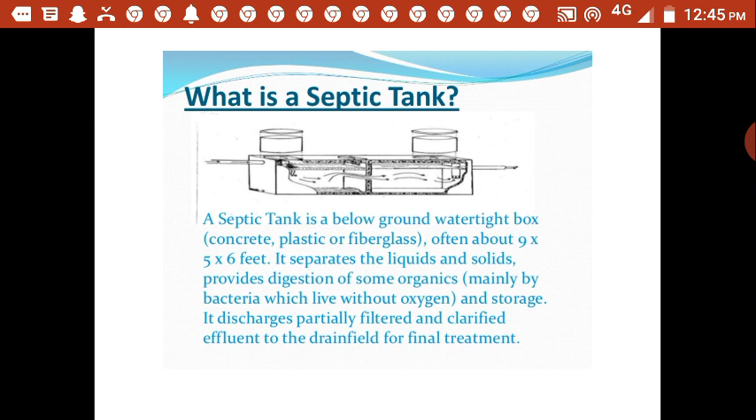Once the anaerobic bacteria digest the human feces, it is divided into small pieces, thereby generating some gases. Those gases consist of carbon dioxide, hydrogen sulfide, and so on, which we'll discuss in detail in the next part. Once it is digested, the pollution related to the septic tank is reduced, and finally it will be disposed to the land. Even after that, some treatment is required.

Then who has a septic tank system? If a building with plumbing facilities is not on a city sewerage system, then in most of the cases it has a septic tank system, also known as on-site wastewater disposal system or subsurface wastewater disposal system, to dispose of the wastewater. Normally in cities also they will implement it.

If you take the example of apartments, if the apartment is not connected to any central sewerage system, then they have to build the septic tank in the apartment itself, and it has to be treated in the in-house treatment system only. Normally we can call it on-site wastewater disposal systems. Means the wastewater is treated in their apartment only.

If it is connected to a central sewerage system, then the whole sewage is taken into one central wastewater treatment plant. Normally we can call it the municipal sewage treatment plant or municipal wastewater treatment plant. There we treat it with many treatment units like screens, grit chambers, sedimentation process, then filtration process and all those things, followed by some biological treatment units. Of course, we will not go in detail about that. But if it is central systems, that will be treated separately.

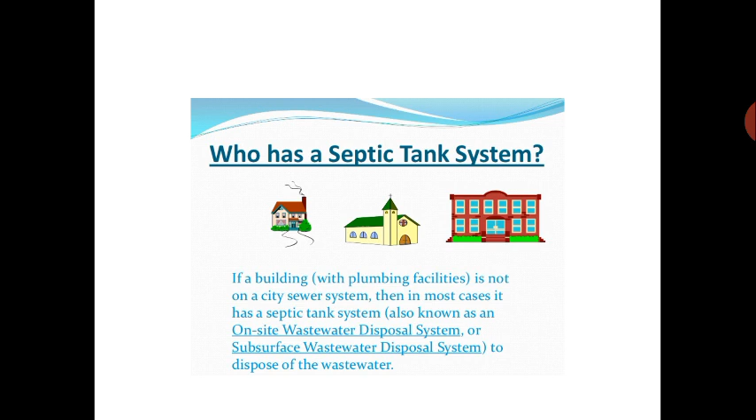So then what is an on-site wastewater treatment system? An on-site wastewater system collects, treats and disposes all the wastewater produced in the building, just like a septic tank. This septic tank is built in the apartment itself, maybe about 20 by 10 by 10. If it is a bigger apartment, normally they will increase the size of the septic tank.

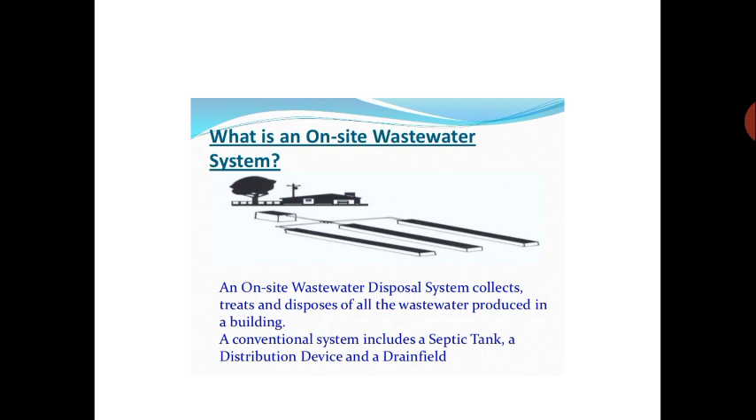Conventional on-site wastewater disposal systems normally include a septic tank, a distribution device and the drain field. The septic tank we already discussed. Distribution devices means whatever pipelines are associated with the septic tank. Then the drain field. What is this drain field? The drain field is also known as the nitrification field.

If you see the composition of the sewage, it consists of nitrates, phosphates, and a very small proportion of potash, that is K. So N, P, K are the major compositions of the sewage. These N, P, K we can call nutrients. So I already said that these are rich in nutrients.

Once these are rich in nutrients, to eat those nutrients there will be a generation of nitrification bacteria. This nitrification bacteria is going to eat that nitrogen-containing food, and it will grow inside the system. So in this drain field, normally the nitrification process is going to happen.

It contains a pipe and other approved materials. It receives the effluent, a partially treated cloudy liquid from the septic tank, for distribution and treatment, and whatever partially treated effluent is there from the septic tank will go to this drain field. There it is going to absorb. Approved drain fields are made from many materials including pipe, gravel, plastic chambers, concrete blocks, polystyrene aggregates, and other piping materials.

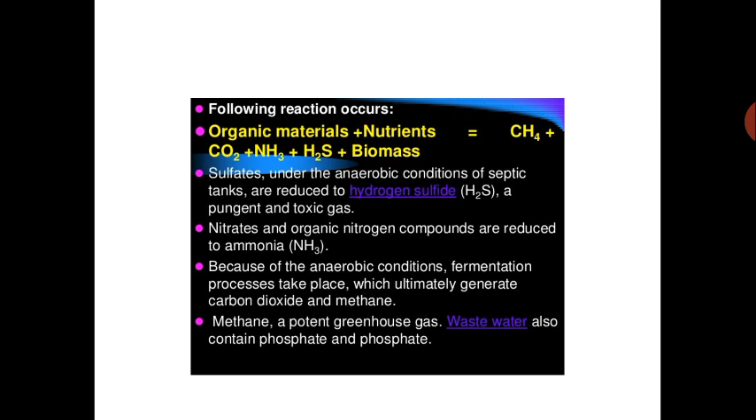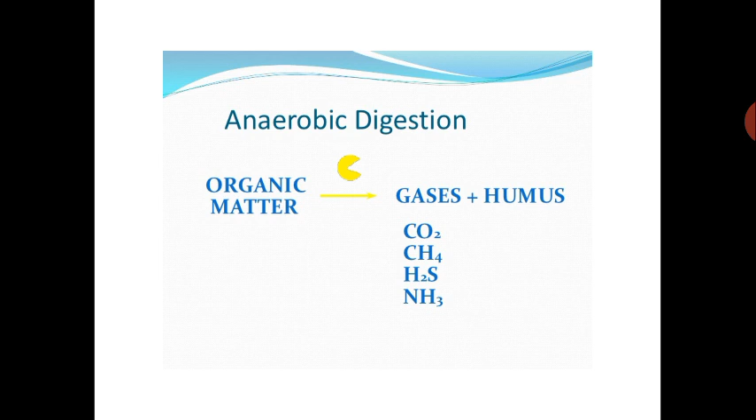Some of the wastewater also consists of phosphates. So this is normally the abstract of the anaerobic digestion process. See how the organic matter is going to divide into multiple gases and other things. The gases which I have listed, that is carbon dioxide, methane, H2S and ammonia, it is going to generate, followed by the biomass. Biomass is nothing but humus. Then what do these on-site disposal systems do? On-site disposal avoids the spread of disease by preventing human sewage from contaminating the ground surface, well water supplies and the streams.

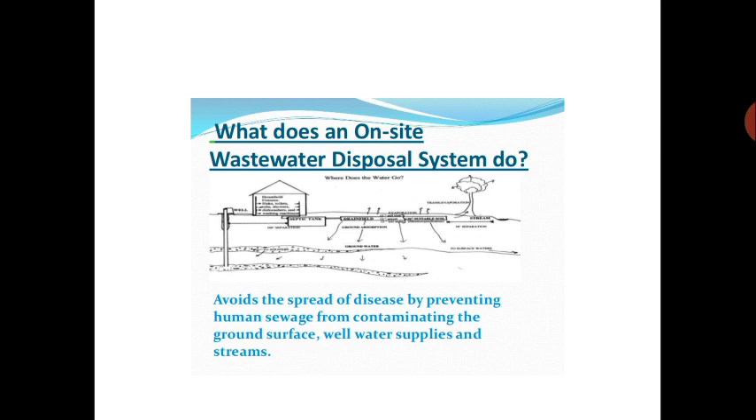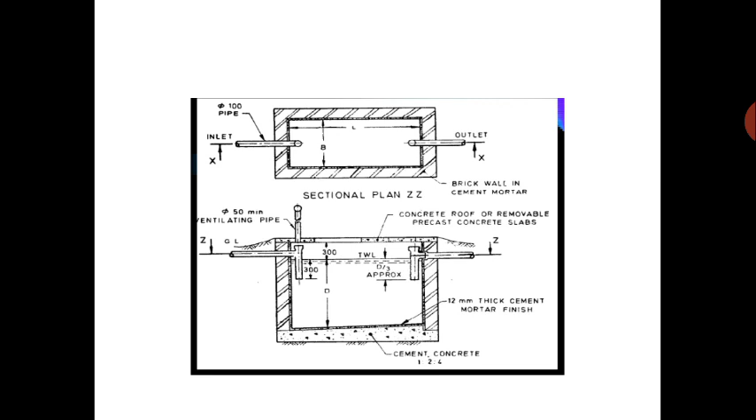This is a typical section as well as the plan of the septic tank. You can see that it is made up of cement concrete of 1:2:4 normally. Then they will use 12 mm thick cement mortar below the bottom of the tank, so that there will not be any leakage from the tank. Once leakage happens from the septic tank, it is very dangerous to the groundwater as well as the surface water. If the groundwater table is high, then whatever leaked sewage is there is directly going to penetrate into the groundwater systems.

And the main problem is that during the rainy season, if this happens, it is 100% going to reach the surface water. Once all the nitrates, phosphates and other things are generated, they join the surface water. Then normally the eutrophication process is going to happen. Eutrophication is increasing the content of nitrates and phosphates in the surface water body, especially if it is stagnant water like lakes. If it is a river type of system, it may not be a problem, because it will flow, and once it flows the water is automatically treated. But if lakes or any stagnant water is there, with no water coming in and going out, in those cases this eutrophication process is going to happen.

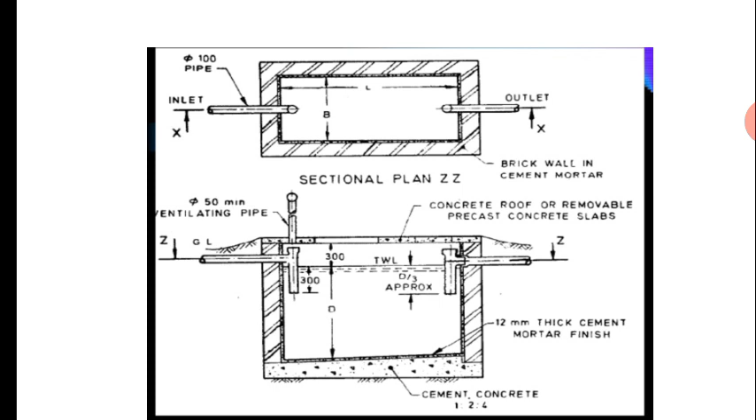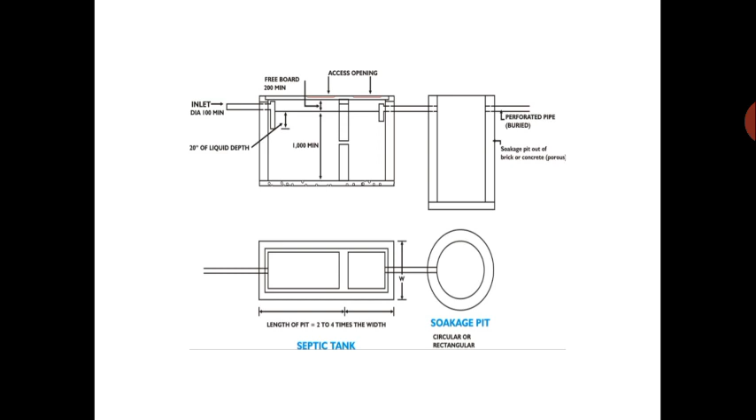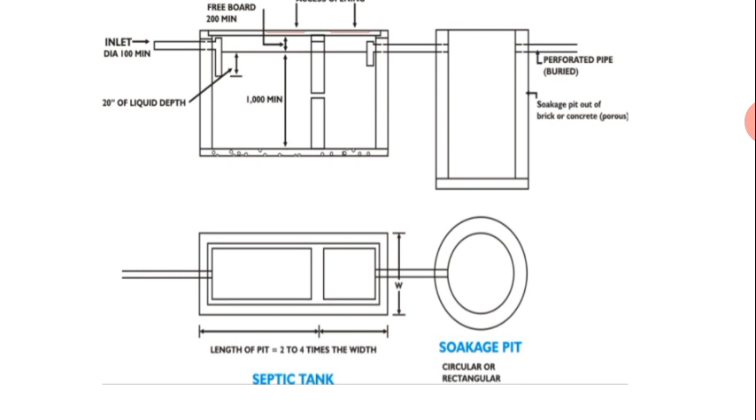And they will construct the wall using brick walls with cement mortar, then the inlet will be there, then the exit will be there. Of course different regions are there in the system that we will discuss in detail. This is how normally it will be: the septic tank, followed by the soak pit. Once the sewage is treated, it will be disposed into the soak pit, where it acts like a filtration process, then finally it is drained off. That we'll see in detail in the next slides.

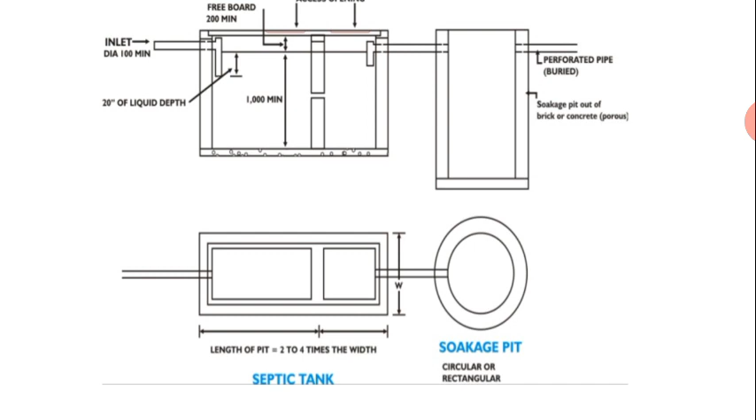So they have given different dimensions; this is a plan and this is a section. Normally two compartments will be there in each septic tank. Of course it depends; if more people are there, then normally we will provide 3 to 4 compartments in a septic tank.

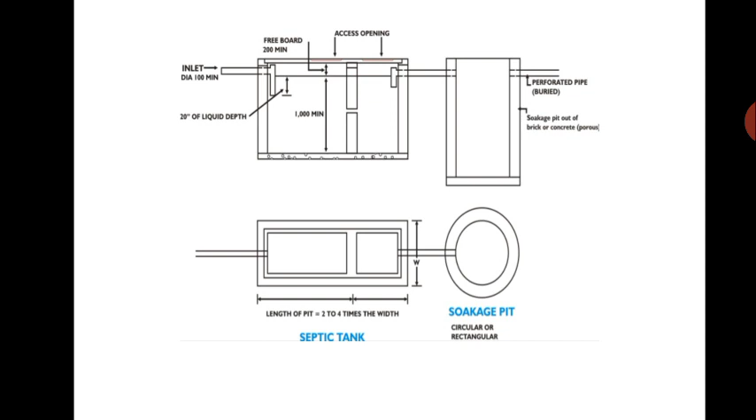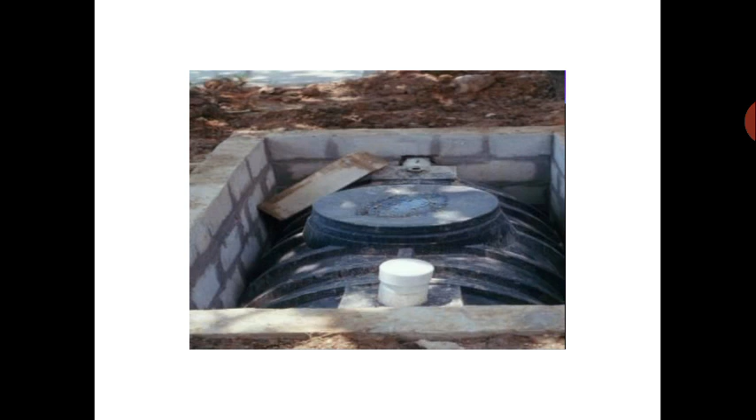This is how you can see the septic tank. Of course this septic tank is made up of polyethylene, where it is completely closed. But this kind of system you can keep anywhere. You can lift those tanks and keep them anywhere, so that nothing is going to happen. It is just like wherever you require, you place it.

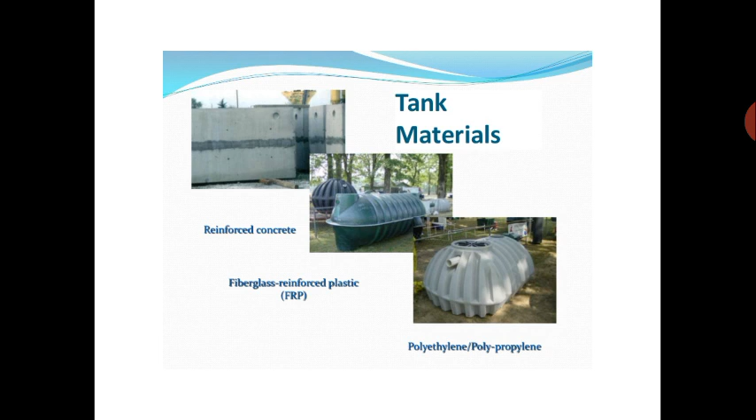The first one is reinforced concrete. The second one is fiberglass reinforced plastic, that is FRP. The third one is the polyethylene or polypropylene type of septic tanks.